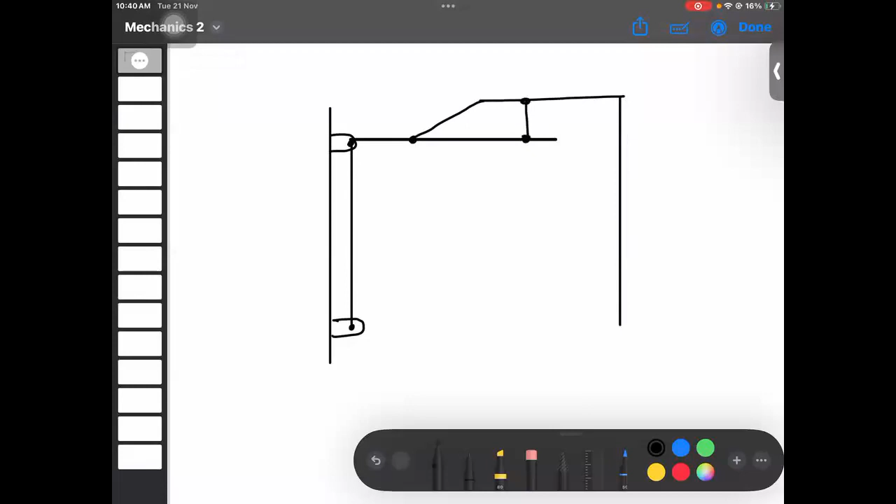This is B, this is E. And both A and F are at the same line, and their respective lengths have been given.

So how do you find the force? The better way of solving this would be finding the forces at D. If I dismantle the frame, take CEF as one frame, and DE links them, and I can take that away. If I can find it, you can see J is somewhere here in between C and D.

If I find the forces at D, what is shear? What would be the shear force at J? If I take the section at J like this, this becomes the right of the section, and this becomes the left of the section. Shear force at J would be the algebraic summation of the forces either to the right or left of the section.

And if I think that there is no CEF frame, if I take away the CEF frame, then I'll have to replace it with the reaction forces, correct? And if I can somehow find the forces at D, then I can easily find the shear force, bending moment, and all the things at J, right?

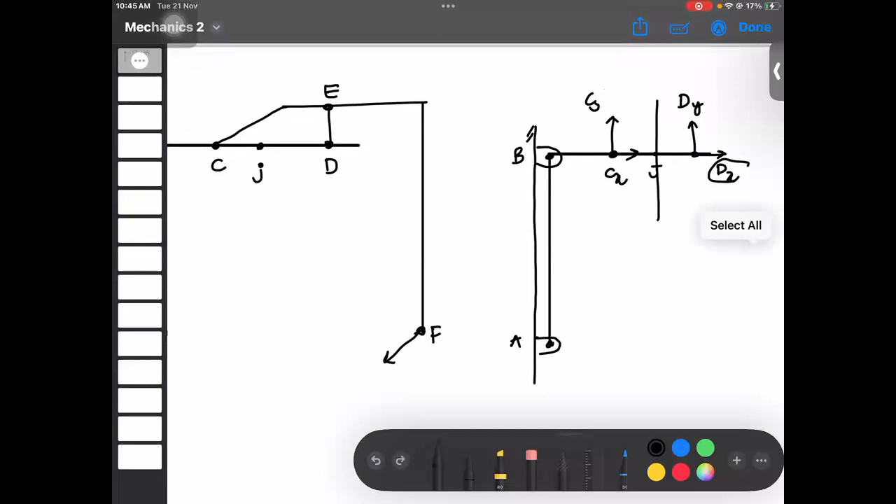So if we can somehow find dx and dy, the problem is over. And dy will also cause moment at J, correct? Yeah, that will cause a bending moment. So our main motive in this question should be solving for dy and dx. DX won't cause any moment, but DY will, right? Yeah, dx is simply passing through J, it will not cause any. So let's find dy and dx, and if we can find them, it's over.

You also need to find bending moment, right? The bending moment is dy times 6 inch at J, correct? Yeah, pretty much, that's the bending moment. So if you can find out dy and dx, that's it, it's over.

So how is it that we can find the dy and dx? We first of all can solve for the whole frame, so that we'll be getting the reactions at A and B.

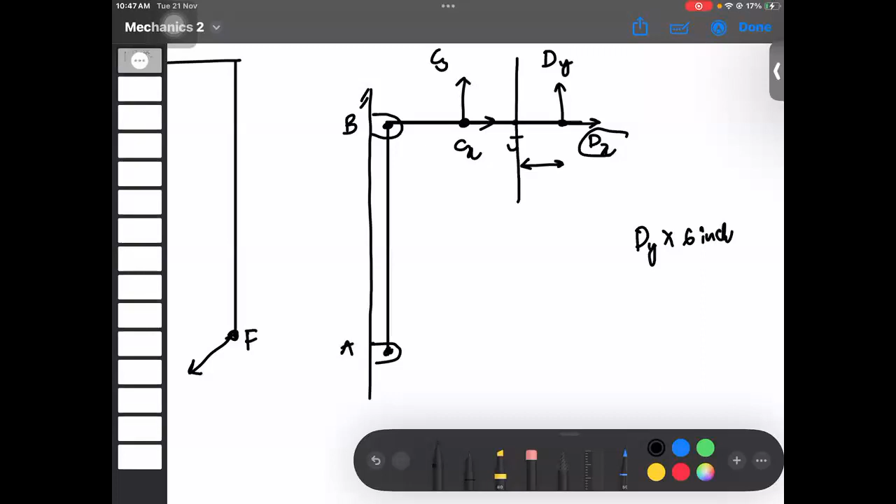Let's take the whole frame. Let's do the equilibrium of the whole frame. At B there can be By and Bx, and at A there can be Ay and Ax, right? And now the force at F, which is 60 pound force, is making an angle of theta.

Is theta given? No, just simply say theta. Do we have to calculate theta? No, I don't think we have to, but I'm assuming you probably need to just to find the X and Y components. No, theta is not given, right? It's not given, but I thought you'd need to find it. Or actually, never mind, you can probably just use it without theta. No, in the solution they say theta equal to 0.

Why? I don't know, you can see that. I don't know why they say that, I'm not entirely sure. Just do it the way you would do it, and that should be fine.

So if it is theta, let me call it some theta, and I can divide this into respective components. This would be 60 sine theta, and this would be 60 cos theta. By plus Ay should be equal to 60 cos theta, and Ax plus Bx should be equal to 60 sine theta, correct? So you're just summing up all the forces, right? Yeah, all the normal forces, Ay and By are upward forces, balanced by the downward 60 cos theta force, and Ax and Bx are towards right, and 60 sine theta is towards left, that must be balanced.

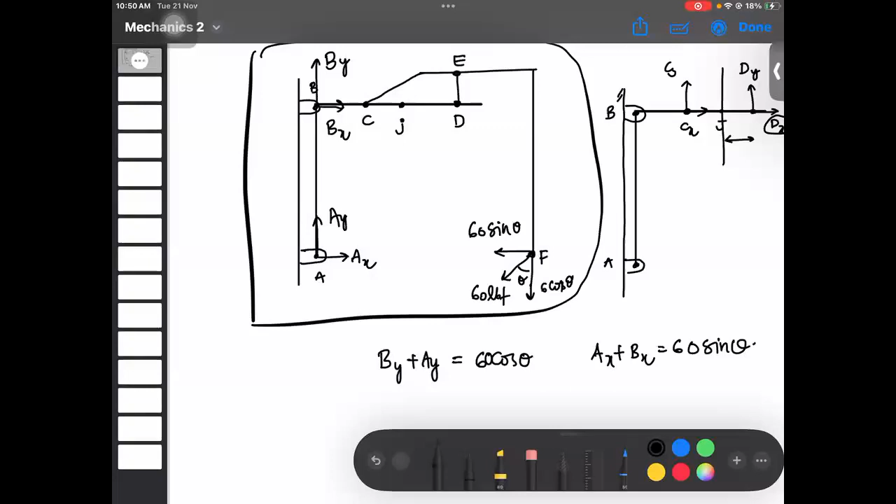See, I have dismantled the structure only at A and B, that's why I'm representing the reaction forces there. I haven't dismantled the member at C and E. Whenever you dismantle the structure from its frame, from its condition, then and only then you'll have to represent it with the forces. And you can see in the second diagram, I have dismantled the CEF frame.

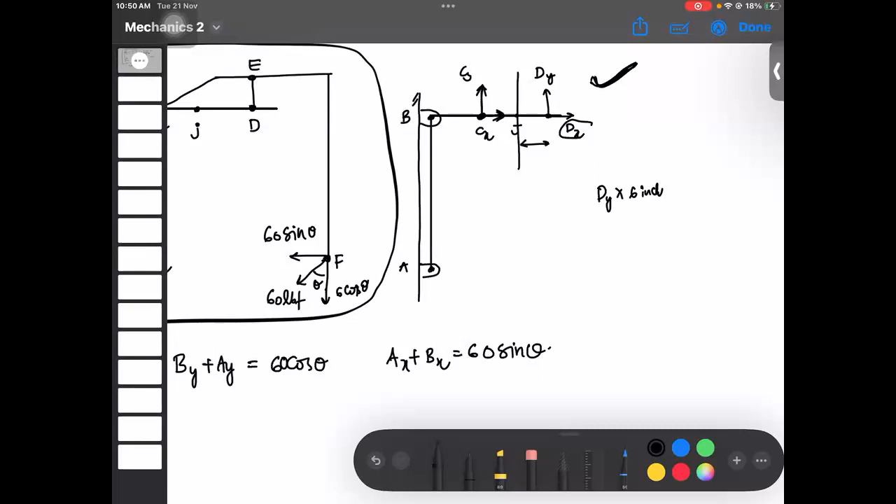That's why I'm representing the forces there. Wait, say that again, sorry. In the second one, I have separated both frames, I have separated CEF from ABCD, and that's why I'm representing the forces, indicating the forces at C and D. Oh okay, okay, in the first one I have not done that. Only I'm dismantling at A and B, that's why I'm representing forces at A and B only, the reaction forces.

So C and D are categorized as internal forces? Yeah, whatever forces are there, they are internal to the structure. No force is acting externally on C and D, right?

Yeah, there are forces there, but for the combined frame, there are no forces there.

Correct. When you separate the frames, when you dismantle them, then we'll have to represent the forces there. You may ask me why I have represented Ay and Ax. The thing is, I should not have drawn this. I have dismantled the structure only at A and B, that's why I'm representing the forces there.

And you can see, if I can draw this, there is also this, correct? The hinge thing and all. Now on the hinge, the forces will be something like this, the opposite of what I have drawn on the frame. When the hinges are on, there are no forces there either, though.

Correct. So in the combined frame, suppose the only force is 60 sine, the external one. And you can see, if I combine this one and this one, again there will be no forces. They get cancelled with each other. They are opposite to each other. Whenever I dismantle the frame only, then the forces come into the picture. When I attach it, the forces get cancelled, they become zero.

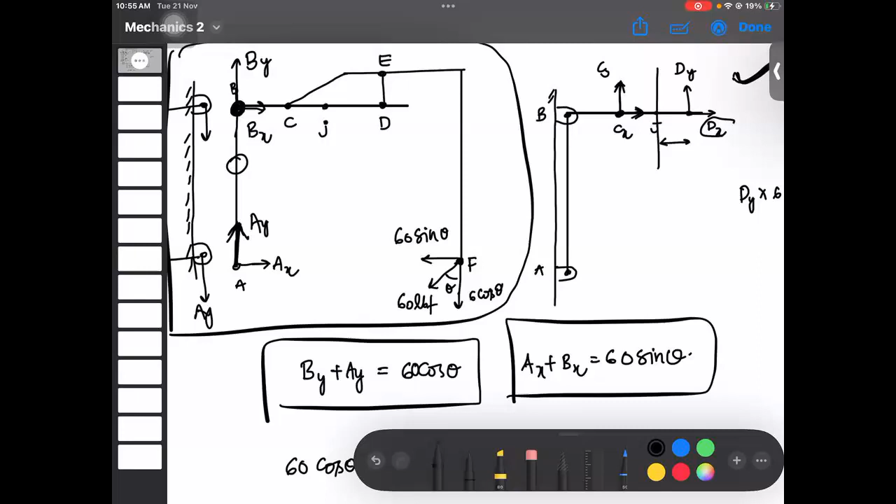And you can see Ax is also creating moment about B, and that will be equal to Ax times 8 inch. Wait, you're calculating the moment from at what point exactly? At B, about B moment, I'm taking it about moment B, that point. So Ax times 8. Yeah, Ax multiplied by 8, correct? Yep, and that would be counterclockwise, Ax multiplied by 8.

And also, 60 sine theta is also creating moment, and that is again clockwise about B. Wait, Ay is not creating any moment because it simply passes through B. Okay, Ax can create moment. Oh yeah, it passes through B, so it can't. Yep, you're right, Ax can create moment, that is... No, I'm saying Ax, Ay is passing through B, so it can't, but Ax can create, which is Ax into 8.

Okay, and what's the moment created by 60 sine theta? It's again clockwise, it would be 60 sine theta into 8 again. Yeah, it's 60 sine into 8. That I'll have to multiply here. Sir, I'll have to add here because the moment created by both 60 cos theta and 60 sine theta have the same sense.

If it's clockwise, it's negative - that's the sign convention I'm used to. You can follow whatever convention you're using, even if it's the opposite. You can do the same thing either way.

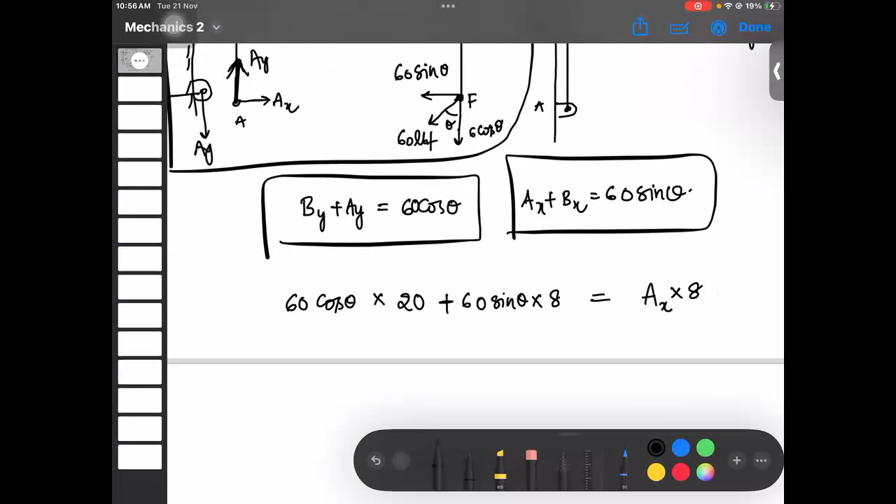Whenever you're taking a moment about something, you write down all the forces creating clockwise moment, then write down all the forces creating anti-clockwise moment, and equate them. That's it.

It doesn't matter about the sense or the signs exactly - clockwise and anti-clockwise moments must be balanced, because regardless it'll get cancelled out. So these are 60 sine theta and 60 cos theta - they were creating clockwise moment about B, whereas AX was creating anti-clockwise moment, and they must be balanced.

So you can see from this - this is one equation. And if they had given theta, I could have calculated AX. So you can see it's the only equation.

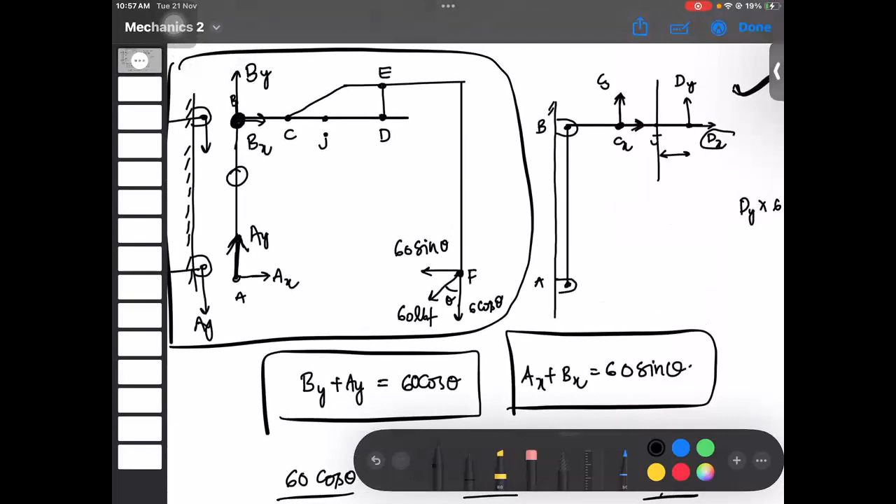I think you could probably just calculate it - couldn't you just do 60 cos theta and then put it in the previous equation and calculate from there? You could write this equation in terms of 60 cos theta and 60 sin theta, but... never mind, that wouldn't make any sense, that would be too many variables.

So far we have three equations and two unknowns - theta can be assumed constant, you can probably assume it's zero. I think if he says it's zero, it's zero. I don't know why they didn't include that.

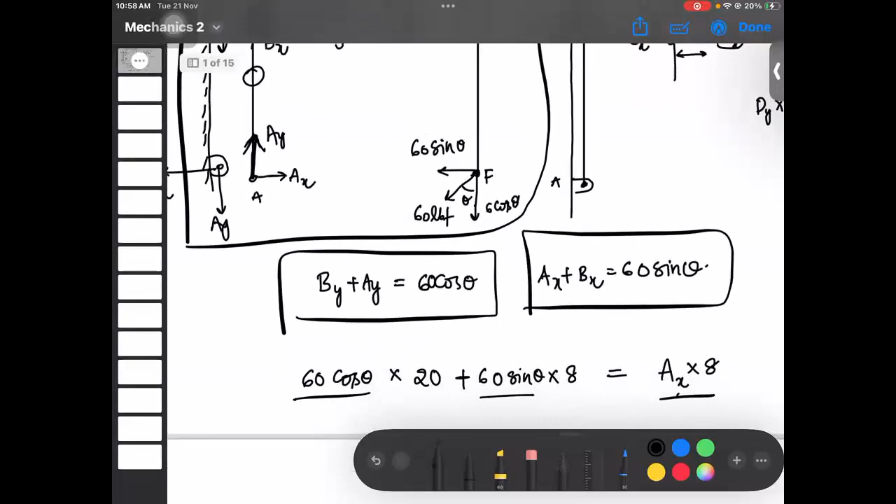So you can just write theta is zero. Shall I take theta to be zero? Yeah, sure, you can take theta as zero. Then sine zero becomes zero, and AX becomes minus BX.

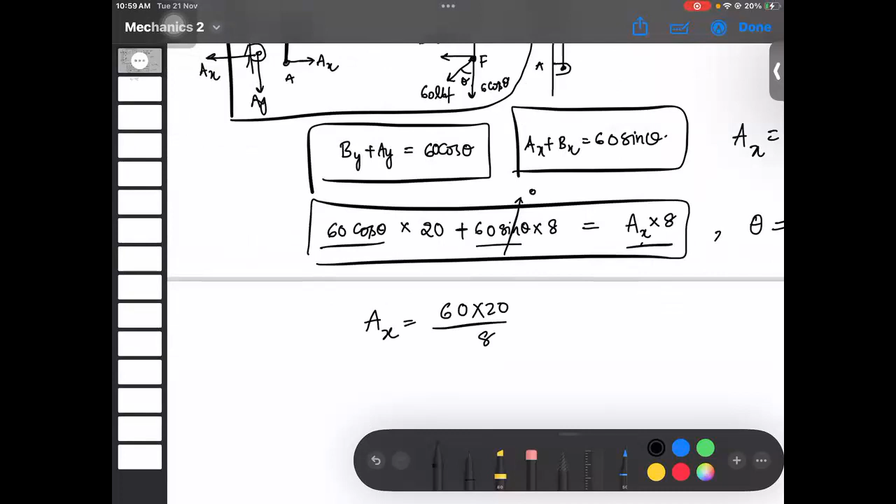From the second equation, this becomes zero, and AX becomes 60 cos 0, which is 1, so 60 into 20 by 8. So AX becomes 60 into 20 by 8, and minus of AX would be BX from this equation.

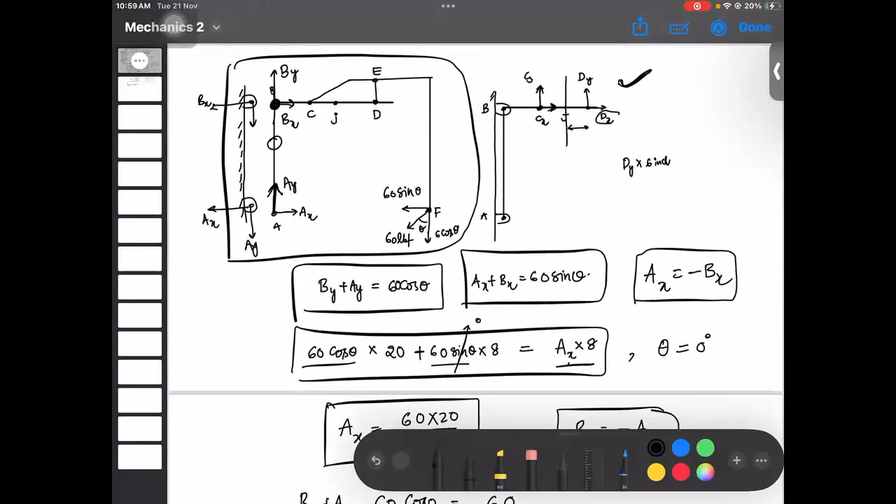And we have one more equation - BY plus AY is equal to 60 cos 0, which becomes 60. So far we've found out two forces, but AY and BY are still unknown. We need one more equation to find BY - the moment taken about A, they have taken moment about...

So we have four unknowns, right? We have four unknowns but only three equations here. Can I get anything if I take moment about B? If I take moment about A, for B I'll not be having anything - I can get BX, but I've already got that, which is minus times AX.

Why don't you take a moment about F? Taking moment about F is of no use actually... yeah, so I can take moment about F. Let me take moment about F. So if I take moment about F, what are the forces that can create moment about F?

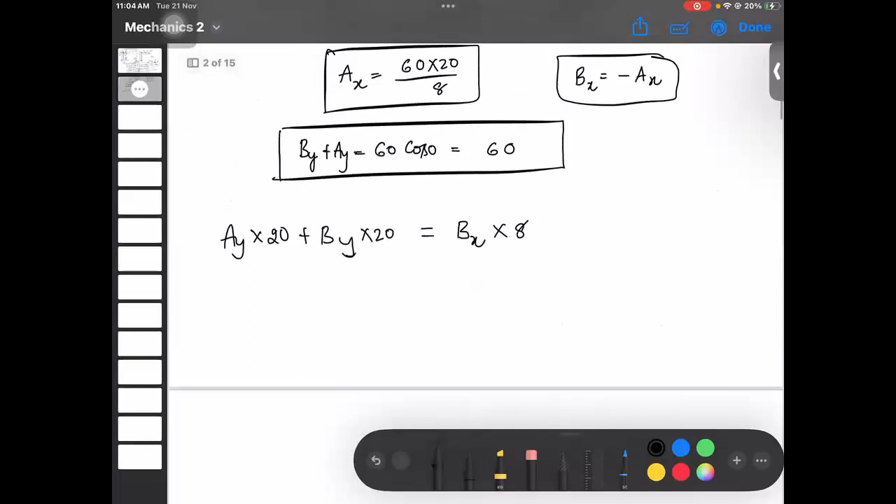So BX into 8, correct? That's one equation. So how does this help us in terms of point J exactly?

So yeah, see with this, what happens, you know. So you see if through all this we can find AX, BX, AY, BY, right? Doing all this will give us AX, BX, AY, BY, and then you can go to the second frame.

Got it? Like, one second. Sum of. Can you go down one second? Yeah, sorry, should I repeat, just want to see that again. I just want to see the last equation that you wrote.

Yeah, this one. See, yeah. AY and BY are in the same sense. The moments created by AY and BY are in the same sense. Okay, yeah, and they are at a distance of 20 inches from F.

And that's why I multiplied AY into 20, BY into 20, and BX is opposite. No, got that. So this is one equation, and you can see AY plus BY should be equal to BX into

8 by 20. BX into 8 by 20. But AY plus BY is also 60.

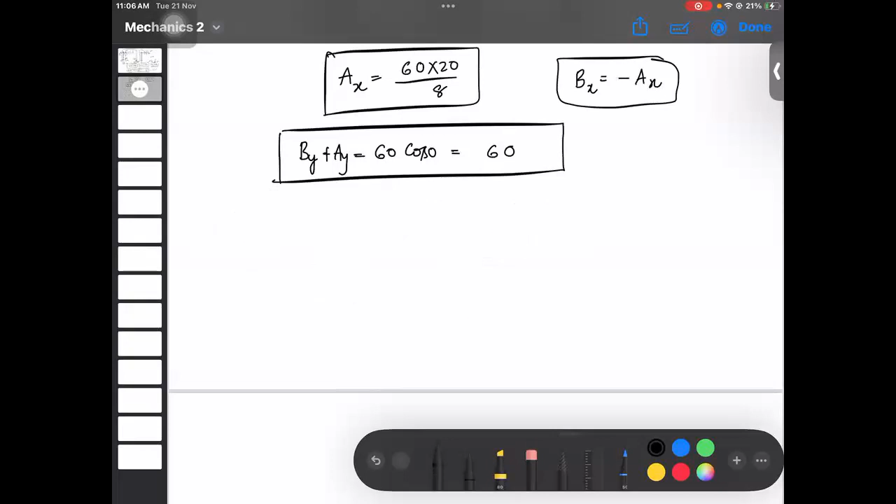So the thing is, you can use it, see, it's a 2D problem, right? It's a two-dimensional problem. You have used the force balance in x direction. You have used the force balance in y direction, and you have taken moment about one of the points, which is, what is the moment we have taken about? We have taken about B. That's it. Then that means you have used all the equilibrium conditions.

Even though you take the moment about any other point, you'll end up with the same equation again. You got? Okay, yeah, correct.

So we basically used all the equilibrium conditions for a 2D problem. Correct, every force is in one plane. So you have used the force balance in one direction, you have used the force balance in the other direction, and you have taken moment about one of the points. So basically you have used up all the equilibrium conditions. Even though you take the moment about any other point, you will end up with the same equation again.

Okay, yep. So that means if we can't take the moment about, so taking moment about any other point will not give us anything. Okay.

So how is that? That's the thing I was looking for. How is it that we can solve for the other two? That was my problem. So okay, let's go through this one.

Suppose we don't know AY and BY, but we know AX and BX. So yeah, that's the thing. You got it right. We have 4 unknowns, but we only have 3 equations.

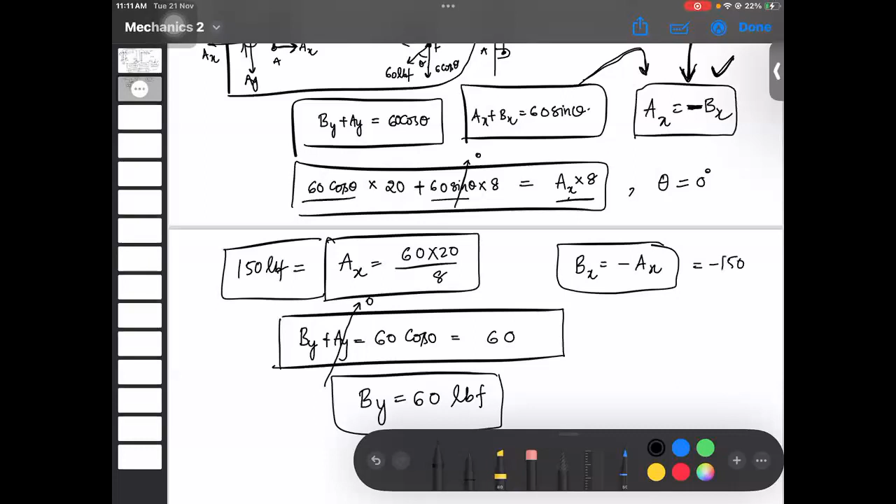So BX will be minus of AX. So that will be minus 150, or you can just reverse the direction. Okay, so now let's go to this individual frame.

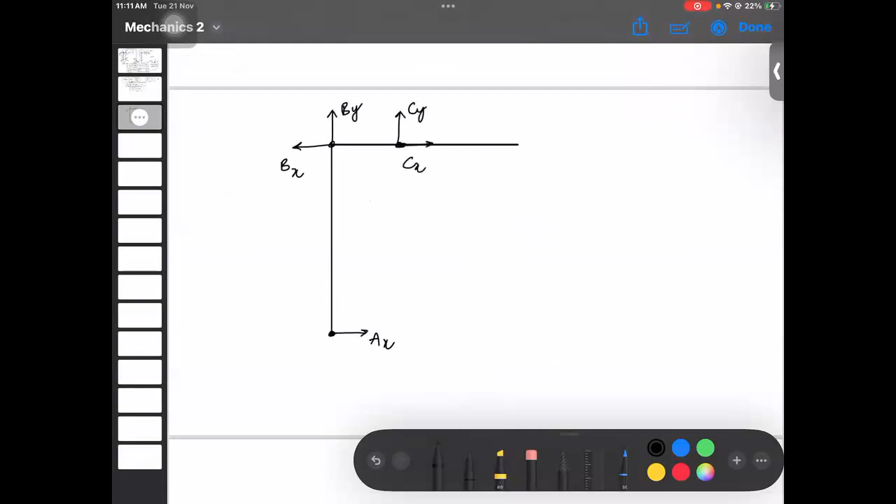Okay, now let's discuss. So we don't have AY, we have AX, we have BX, that is up. They should be in opposite direction because AX is minus of BX, and we have BY, and we have dismantled it. We can have CY, and we can also have CX. There is Z somewhere here, and at D, completely dismantled it.

Yeah, I've dismantled both the frames. This is Dy and this becomes Dx. Okay.

So first you find the separate forces, and then you do it in terms of section J. Now, initially I took the equilibrium conditions for the whole frame. For the whole frame, okay, I have dismantled the joints at A and B. Okay, initially. Now I'll also dismantle the other frame, C, D, and E.

Sorry, C, E, F frame. If I dismantle C, E, F, then when I separate them I'll have to represent the forces there. And if you are confused, the free body diagram of the other frame looks something like this.

I'll do that for the sake of idea. So this is E and this is the other frame. Okay, and now you can see at D, I've taken dy and dx like this. Now I'll have to take dy and dx like this.

And this will be Cy and Cx. There is a force of 60 lb at F. This is the free body diagram of the other frame. But theta is 0, so isn't it directly downwards? Okay, this will be 60 lb.

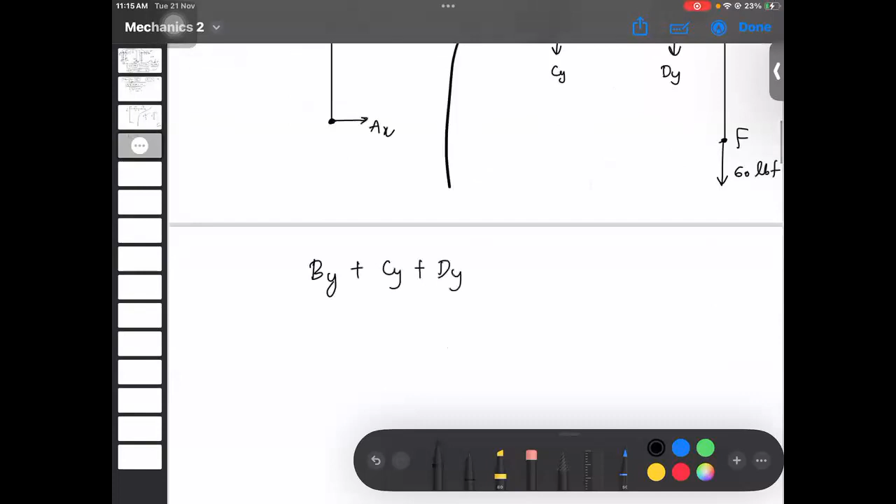After you solve that, you will get some of the forces as minus. Obviously, not all forces in the upward direction will yield the equilibrium condition. Some of them, one of the forces at C and D, may be in the downward direction. I don't know which one is downward so far, but for that I'll take by plus Cy plus dy, let it be 0, because no force is in the downward direction, right?

I mean the 60 lbf, but that's in a different frame, so it doesn't count here. This is one equilibrium condition: summation of forces in the y direction must equal 0. And let's do the force balance in the x direction.

And we can also take, let's do this one, moment balance about point B. If I take moment balance about point B, what is the moment created by Cy?

The moment created by Cy about B in the first frame. I'm talking about only the first frame, writing for ABCD. This is A. Cy about B is counterclockwise, and dy about B is also counterclockwise. The moment by Ax about B is also counterclockwise, correct?

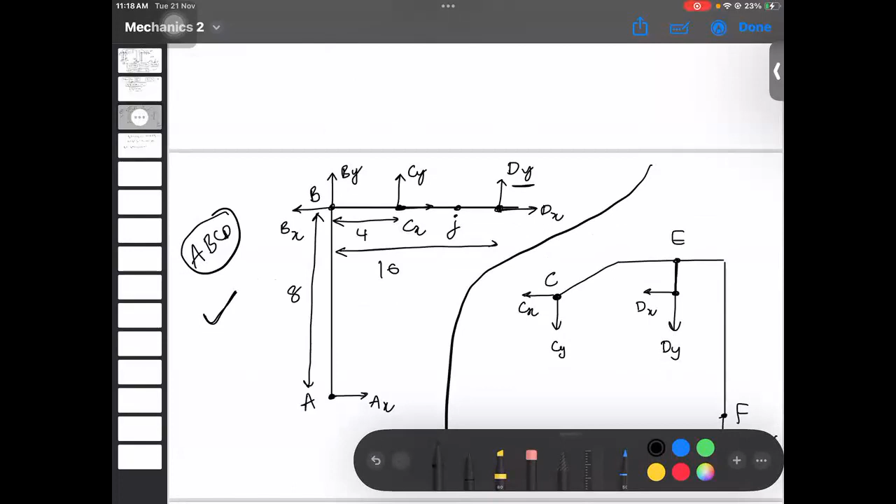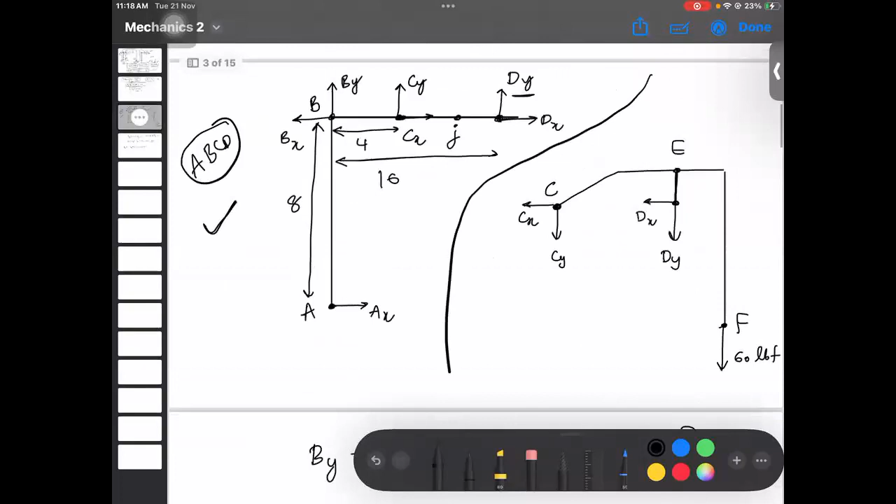Correct, so my intention is to find dy and dx now. So just leave J for now. And let's talk about the moment equation about this point. And you can see how many unknowns we have - we again have 4 unknowns, and we used up...

So do we have ax, correct? We have ax, and we also have BY as well, so then we can do two different equations. Because we have these two equations, we have BY, which is 60, so we can move it to the other side. So CY plus DY is equal to 60, and then we can just do simultaneous equations from there with 1 and 3 to find CY and DY. From 1 and 3 we can find these two. Yeah, let's do this.

Okay, we have this equation, correct? So from 1 and 2, what is it that I can use here? Let's take this from 1. What is it that I can write? Cy plus dy is equal to minus by, which is, from minus this, BY is 60, as you said before. And from this I can say, from equation 3, Cy plus, I'm taking 4 as common, 4 dy must be equal to minus 2ax. If I take 4 as common... I'm taking 4 as common. This 8 becomes 2 times 4, and this becomes 4 times 4, 16. So 4 can be taken common, and equated to 0. And this is what I get, correct?

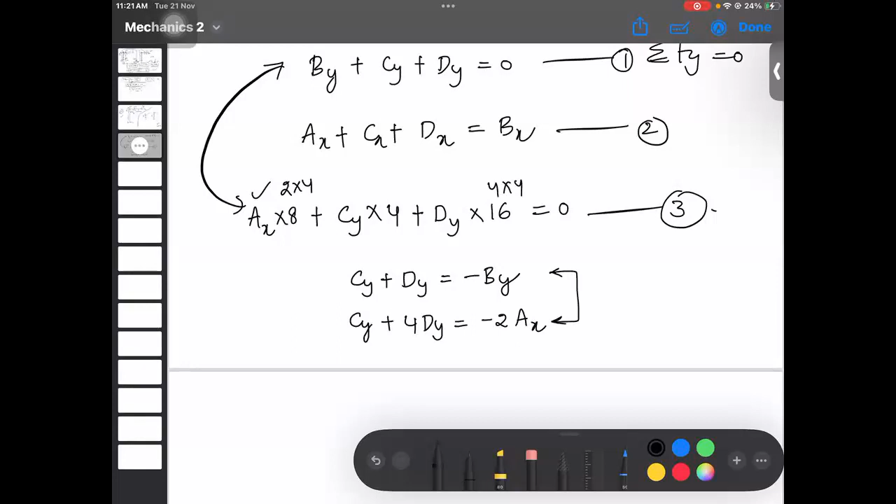These are the two equations that I get, correct? Yeah, you do get those. Let us subtract equation 3 from equation 1. So this cy gets cancelled. From this I can get 3 times dy should be equal to minus 2ax plus by.

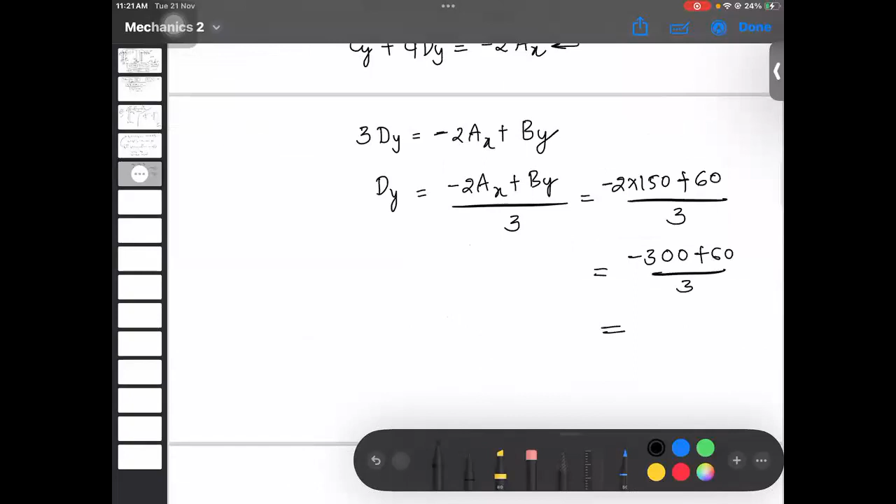And we have, from dy, I have this minus 2 times ax plus by, divided by 3. And what is it that we have for ax? Ax is 150, so we already calculated this. Minus 2 into 150, and for by, I think we have 60. That is 60, divided by 3. And what would be this? This is minus 300 plus 60, divided by 3. And minus 300 plus 60 might be minus 240, divided by 3. And this would be minus 80.

Correct? So yeah, and you can then see DY, we are getting... One thing, we are getting a minus sign, right? That means I'll have to reverse the direction of dy, like you said before. Let's just take the... no. Initially, when you are not sure about the sign, you can take it in one direction. If the answer comes out negative, then you will have to reverse the direction.

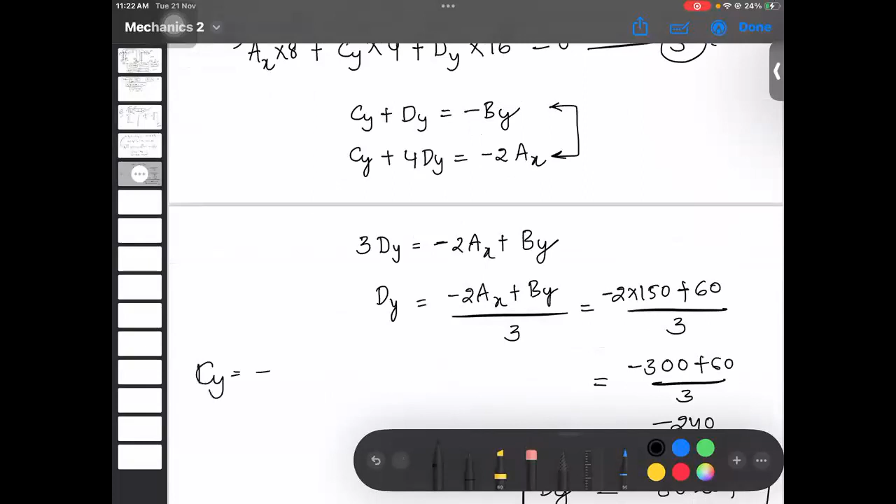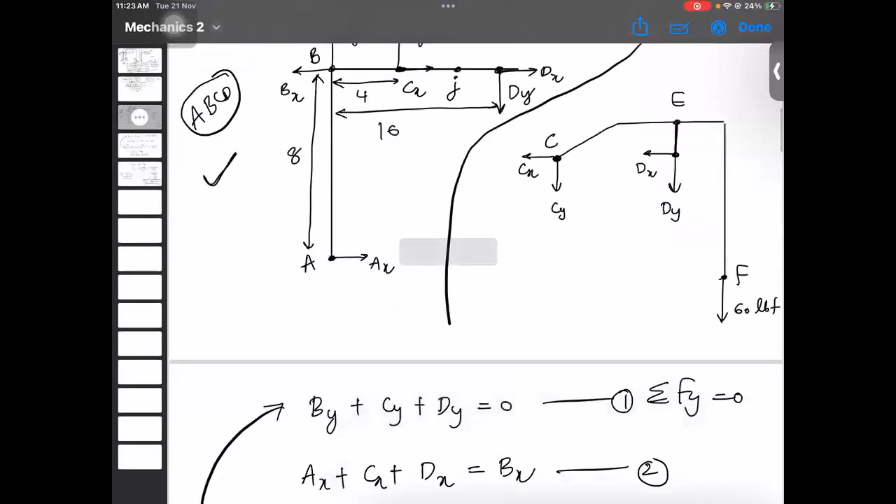Okay, so now this will be the direction of dy. And let's talk about what cy is from this. You can see, from the first equation, cy is minus by minus dy, correct? Yeah, so it's 20. One second, and by is 60, and what is minus dy? Minus dy is plus 80, so it would be 20, like you said. And since you are getting the same direction, which is positive, correct, that means you don't have to reverse the direction of cy. And so that will be this.

And what about cx and dx? So we can find cx and dx like this. You can see for that, so far we have found out cy and dy, right? And we are yet to find, we should still find cx and dx. And you can see in this abcd frame we had four unknowns, right? Cx, dx, cy and dy. That can't be found out with three equations, correct? Yes, and for that we'll have to take the help of the FBD of the other frame.

You can see we also have one more frame, the cef frame. And in the cef frame, if I take the force balance in the x direction, you can see cx plus dx should be equal to 0. And that means cx should be the negative of dx. Let's use this here. If cx is negative of dx... Okay, and that means they get cancelled actually. They get cancelled. Yeah, okay, okay, okay.

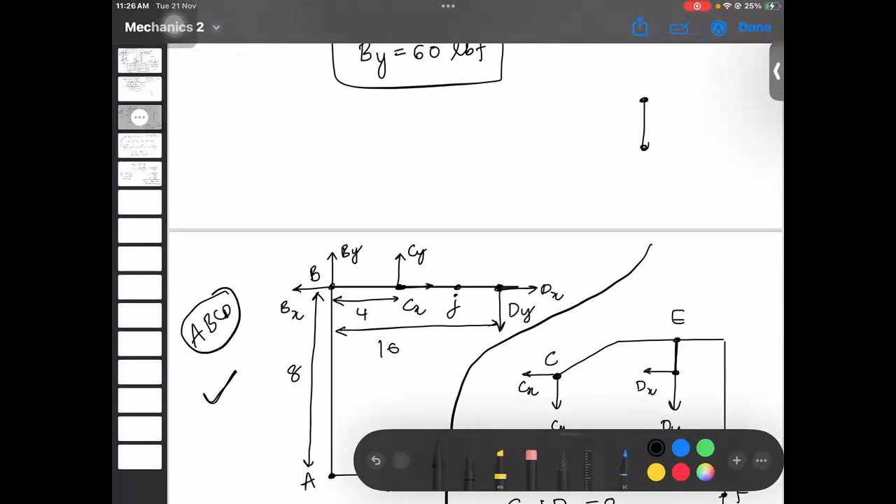So we still have one more frame like this. For this frame, we have one more small frame which is DE. Can you see those two frames have been linked to ED, correct?

And you can see for this ED frame, whenever we have a two force member, the force should be only along this direction. So this is a single structure, that's one thing you'll have to remember. Whenever we have a single force, single member, the force will be along the member.

For this to stay in equilibrium, you have a single line like this, like a single metal rod with D and E, the force will be on either side, and we will not have any force like this.

So let me talk about this DE frame. I just dismantled DE. So if I just dismantle DE, what is it that I have to represent? I'll have to represent EY, EX, and DY and DX, correct?

Wait, I've taken just that small DE pin, which is connecting both the pins. So when I just dismantle that out of the frame, I'll have to represent every force that is acting there, correct?

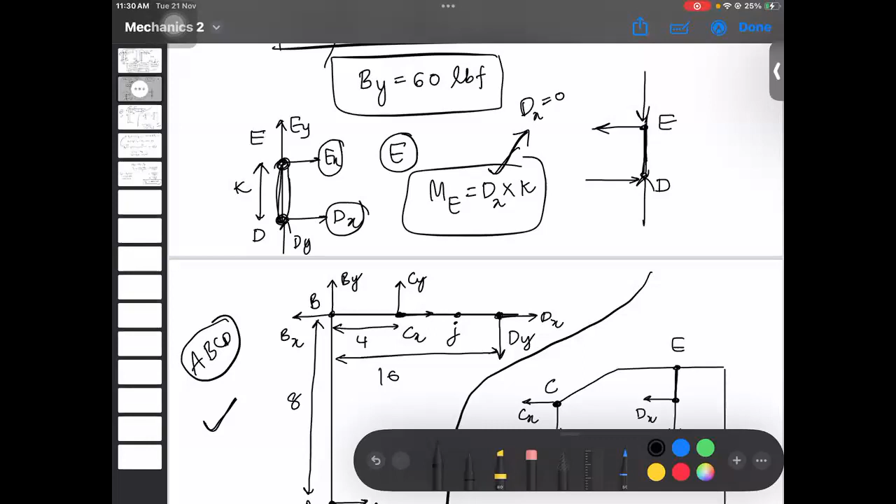The other way of countering it: if I take the moment about D, then only EX can create moment about D, correct? And again the same thing, this link is not rotating about D, so EX should also become 0. In that case, whenever you have a single pin structure like this, you will have only forces in this direction.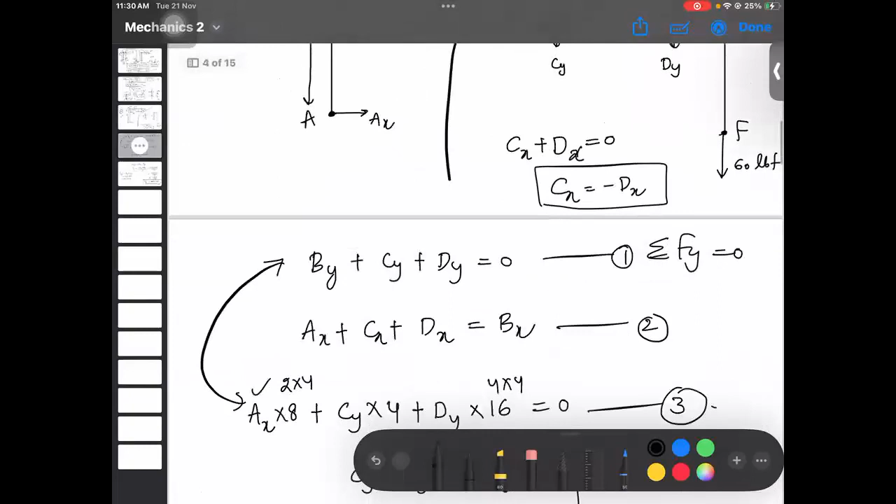Single straight member like this. That means dx should be 0. So from this we get dx as 0. If dx is 0, cx should also become 0, because cx plus dx was 0.

Wait, sorry, go up again. Isn't dx 0? So we conclude cy and dy will still be there, right? Cy and dy will still be there.

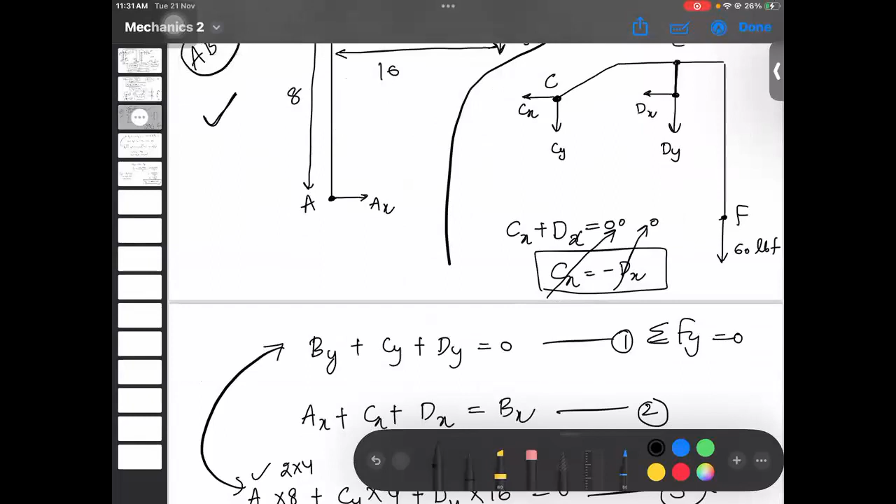Oh okay, I got it. DX is 0. If dx is 0, then from this equation, cx is also 0. Dx is 0, and so then we will be getting this anyway.

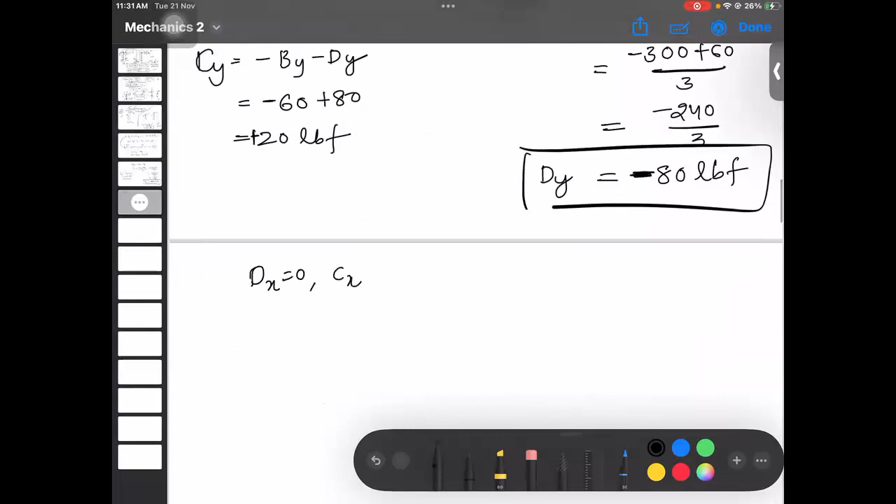And the thing is, we concluded that dx is 0 and cx is also 0. So dx and cx are 0. Now let's come to J. Now we have found out everything. Dx is 0.

Now take a section at J. Now what would be the shear force at this section? If I take a section at J, this will become the right of J, and this will become the left of J. What is the shear force at J?

Shear force is the algebraic summation of all the forces either to its right or left. If I solve for shear force at this section J using the right part of the section, I only have one force to its right, which is dy. So what would be the shear force at this? That would be dy. Shear force at J.

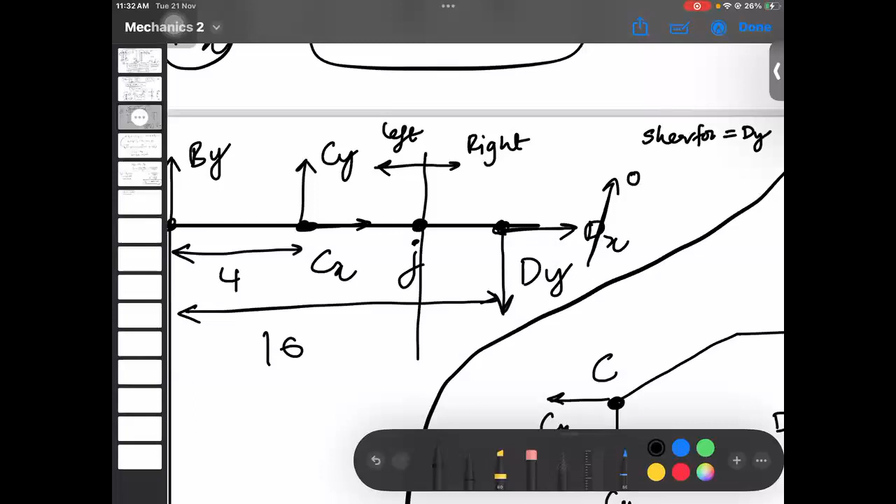Positive, right? So if we are solving from the right part, that would be positive dy. Okay, and that's one thing found out.

And what would be the moment? What would be the moment at J? Bending moment at J, dy times 6 inch.

Again the same thing. No, no, I got it, I got it, I'm just writing it down. I'm finding the bending moment using the right part of the section. I only have one force that can create moment at J, which is dy, and that would be equal to dy times 6.

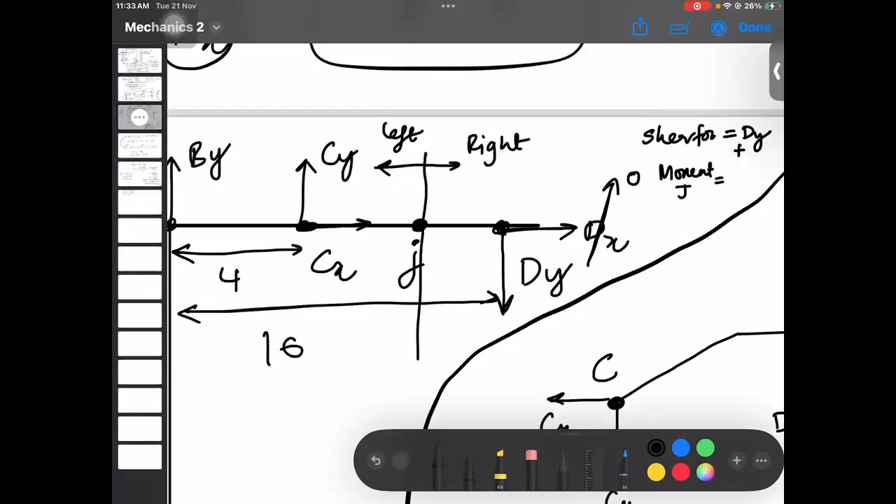Shear force is just dy, right? Which is positive, and then bending moment is dy times 6. Bending moment will be dy times 6. And what is the axial force?

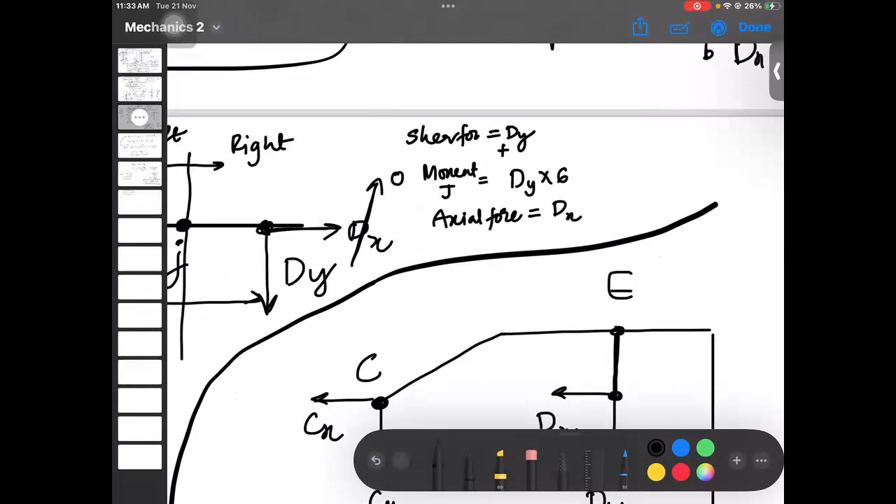Axial force should be dx, but dx is 0, so it's 0. That's how we find out shear force, bending moment, and axial force at J.

Is that it? Or there must be more, right? No, no, no, that's it. We have found out axial force, shearing force, and bending moment. The three things they are asking for in this question.

So that's 0. And what is V? V is shear force. And in our case that's dy. What is dy that we got? Which is 80.

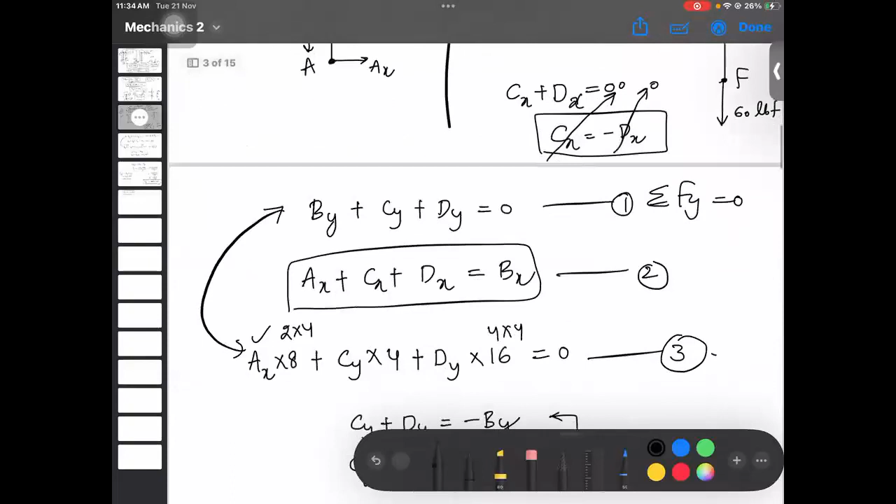Dy that we got, yeah, that's 80. Negative 80. So, since we are solving for the right part, that would be positive, correct? You can see that is 80.

And in this question, in your answer, they are solving using the right part or left part of the section. The reason why I've taken the right part is because I had only one force to its right, correct? That would be simpler, easier that way. We are still getting the same answers, right?

Yep. And what is the moment created? Moment created would be dy into 6, correct? From our part, from our solution.

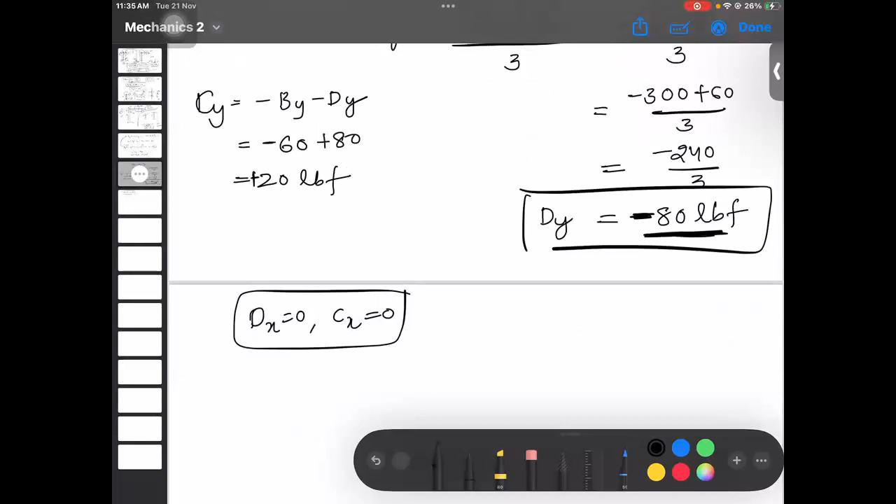Yeah, dy into 6, yeah, you're right. Dy is 80. 80 into 6 is 480. So even your answer is also right, yeah, it's correct. So that's the reason why I've taken the right part, and that's the reason why I'm so much interested in finding dy and dx.

Okay, because I have only two forces, right? So I won't be bothering about cy, by, cx, ay, and all those things that's left.

Okay. You can still... the formula that I'm so confused about, what is the formula that they used, what is V in that? I'm kind of confused there. Okay, so they are solving, using the right, actually that's shear force.

Oh, so yeah, they broke it at that part. See, that's so my doubt is, even my professor, he breaks a section, and then he draws directions for the moment, the axial and the shear. So how do I draw the moment for the axial and the shear? Like, how do I draw those directions? What is the logic behind drawing those directions?

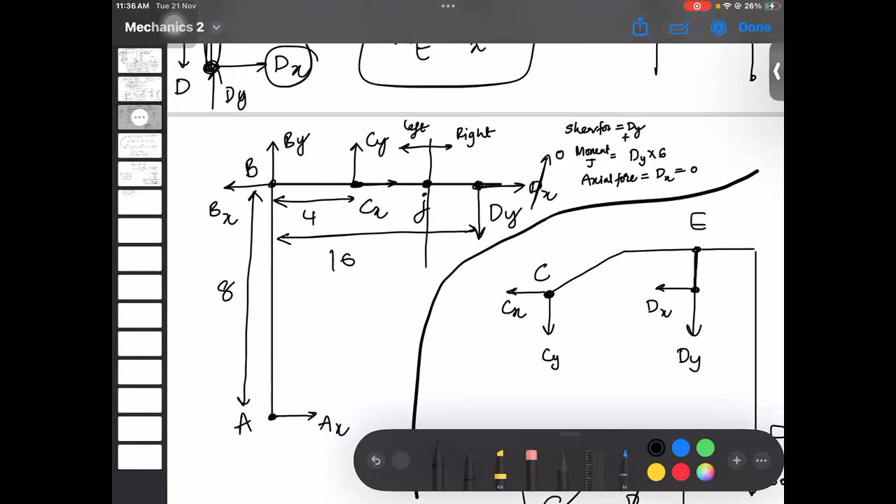See, he broke it at J, and he took the left side, right? That's what you can see. He took the left side, and suppose we are solving for shear force using the left of the section. What are all the upward forces to its left? Only upward forces can create shear force at J, correct?

Yeah, and what are the upward forces that are there here? By and cy, correct? And since we are solving using the left part, all the upward forces will be taken as positive, and the shear force will be by plus cy. That's it.

No, I understand the logic. It's just what are the directions I should use. If you see the example, he's written F towards the right, he's written the moment, and he's written the axial force and the shear force, right? He does that for every question, where he writes the diagram and writes the forces like that on the section.

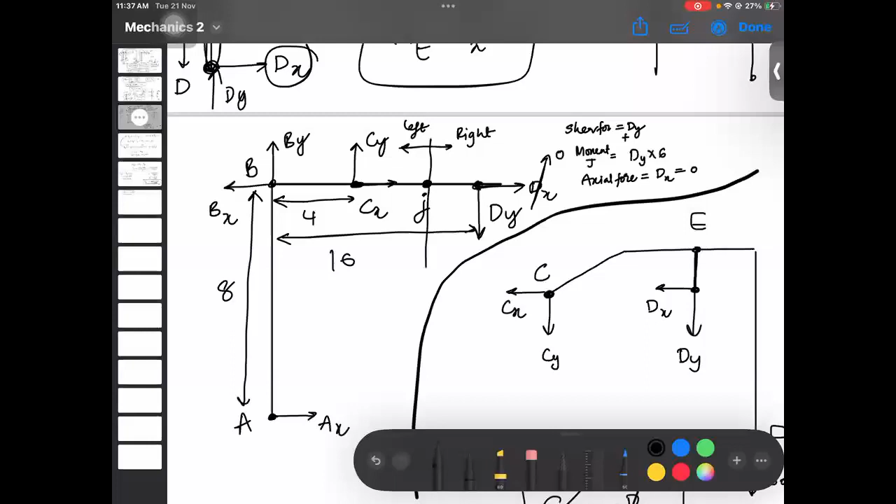Yeah. So I got how that... so how do I intuitively write those diagrams? Because that's how he does it.

So the thing is, he breaks the section at J. Yeah, he breaks it, that's what I'm trying to tell you. Whenever he breaks it, he draws forces on that end. I understand where he's drawn the forces, but the direction of the forces is what matters in that case, because that's what gives you the right answer. At J he has broken the section.

Okay. Yeah, he broke it right before J, and he is taking the left part to solve for the answers. Yes, so we have by like this, and we also have cy like this. You can see, if I break, now we also have bx and ax, right? And you can see I have broken the section at J. By and cy are in positive y direction, correct?

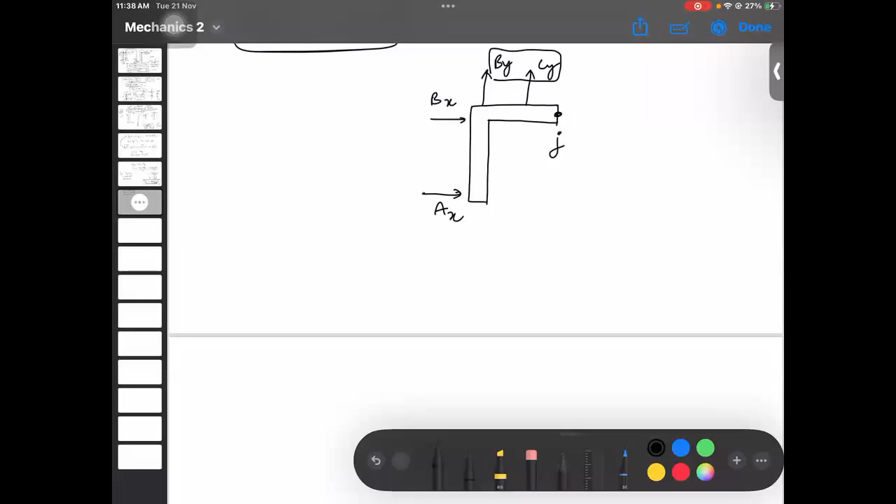The only way this frame can be in equilibrium is if there is some force acting in the downward direction at J when I break it. There has to be. That becomes your shear force.

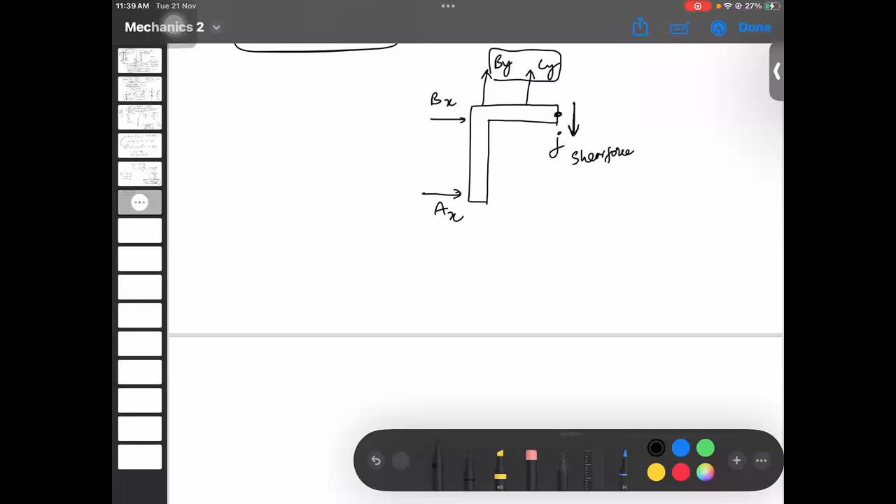Wait, sorry. So when you break it, you need to oppose the two forces going upwards, right? Then only it will be in equilibrium. So when you do such a question, you think of actually breaking that bit, and then you see where. That's the idea, you mentally break it first, and then you calculate.

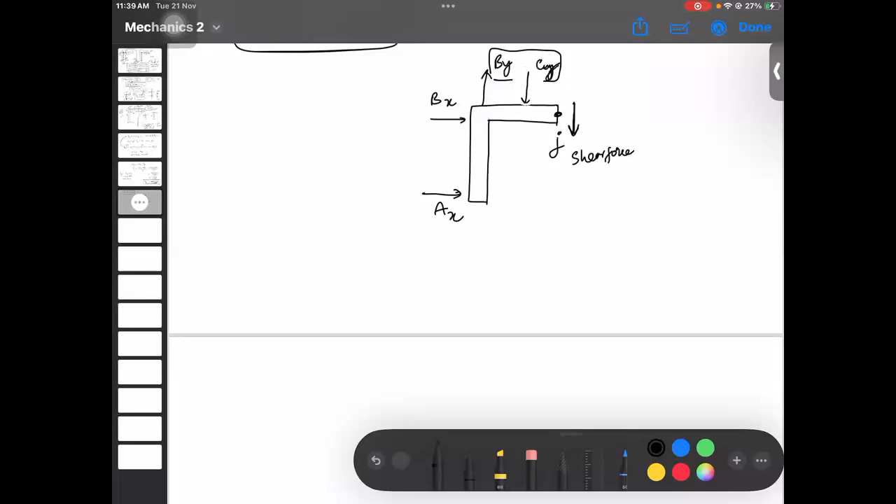Suppose in this question, forget your question for a moment. Suppose by is in the upward direction and cy is in the downward direction, and let the value of by be 60, and let the value of cy be 80. Now, what is the net force on this section because of by and cy?

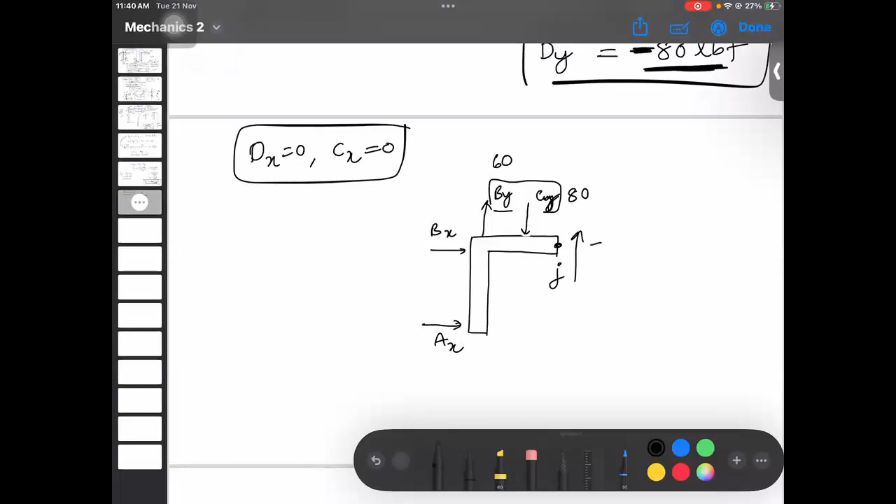It's downwards, like 80 minus 60, so 20. Net force of 20 in downward direction, correct? Yeah. Then for this frame to be in equilibrium, there should be a shear force of plus 20 in positive direction, correct? Yes. So that's how we decide directions.

Okay, understandable. But how does he do axial and bending? Like, which axial and bending direction does he take? Let me explain. You understood the shear force direction? Yeah, understood that. So by and cy were opposed in positive direction. To oppose that, there should be a net shear force in downward direction.

So that is v. Now, from section J, the only forces acting in section J with a Y component are the ones that can create a bending moment going in the anti-clockwise direction. Yes, so the bending moment will be anti-clockwise, and the axial force would be parallel to the x axis, so that would just be straight out of the broken piece.

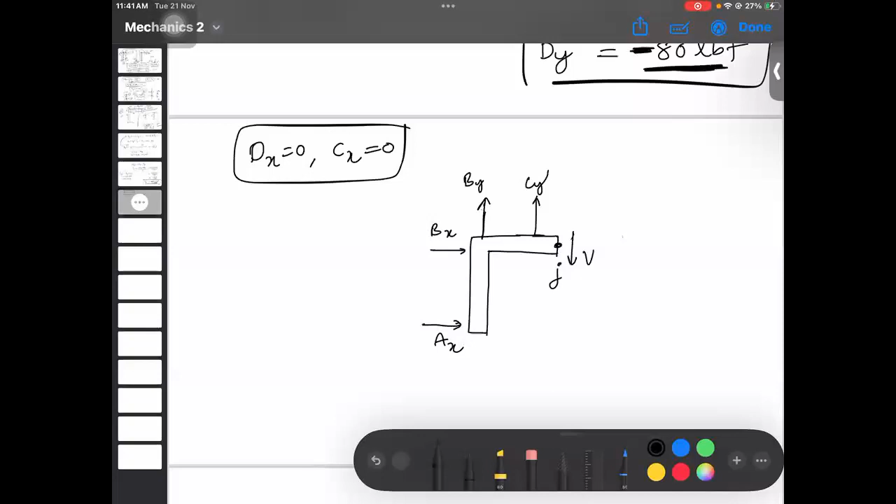One more thing you need to consider is this: whenever we have a single pin structure, we will not have forces in x direction. They become zero. Yeah, I got it, that's how we got dx and ex to be zero.

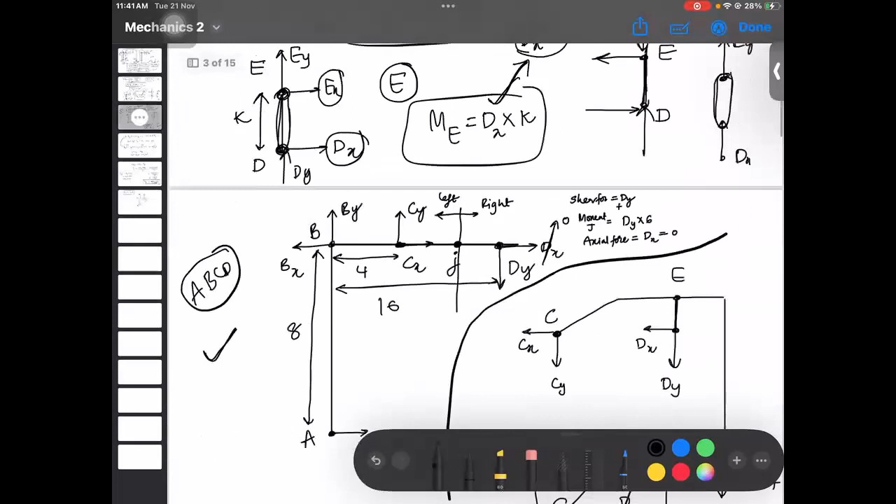Yeah, okay, so it's better to solve it using the right part of the section, so that you don't have to deal with so many forces. Yeah, it seems easier, much easier. Correct. If we solve using the left part forces, you actually have ax, bx, by, cy and all, so it's too much.

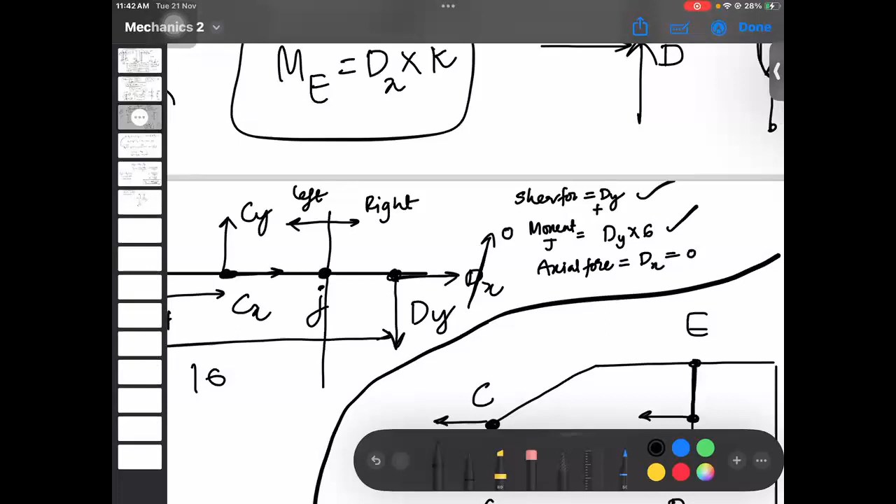To its right, anyway dx is becoming zero, so you only have one force, which is dy. So shear force becomes plus dy, moment becomes dy into 6, and axial force is dx, which is 0. Yeah, so this is how this works.

So first of all, what you have to do is find the equilibrium for the combined frame and find out the reactions at ay, by, cy, and dx, and then dismantle the frame. Okay, yeah, okay, that's how you proceed.

And while dismantling, there is a structure de, because it's a single pin, there won't be any dx, no forces in x direction. You understood the reason why, correct? If there were any forces, the pin should be rotating, but the pin is not rotating, so that's the logic behind it. That's how dx becomes 0.

Okay, okay, so yes, any other thing, anything else?

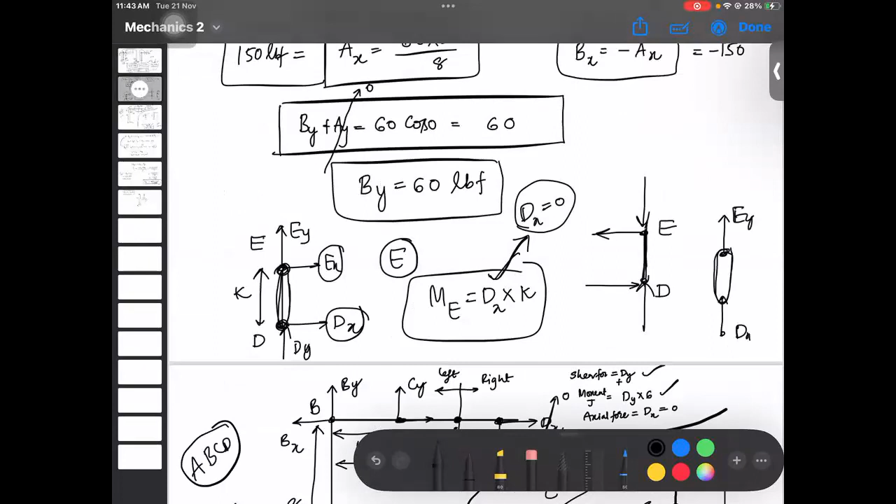Yeah, I sent you the other question, but if you don't have time, you can just send me the worked out answer or how you did it. Shall I do that? Okay, can you just do that handwritten solution? I'll write it down, also for the next class.

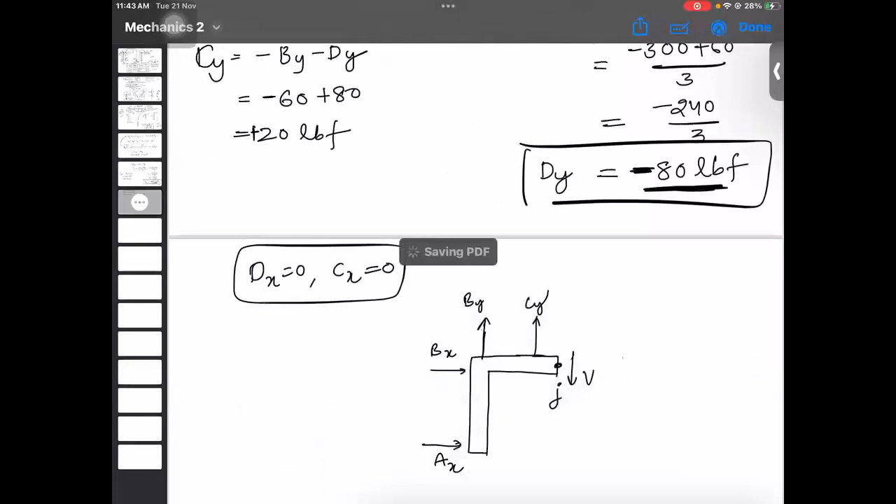Yeah, the next class, can we do it next week? I need it because the week after I have an exam, so if I have any questions, I can just ask you right before my exam. Okay, note down all the doubts that you have, and you can simply ask me. Can we do it next week then? Because the exam is the week after next week, on December 5th.

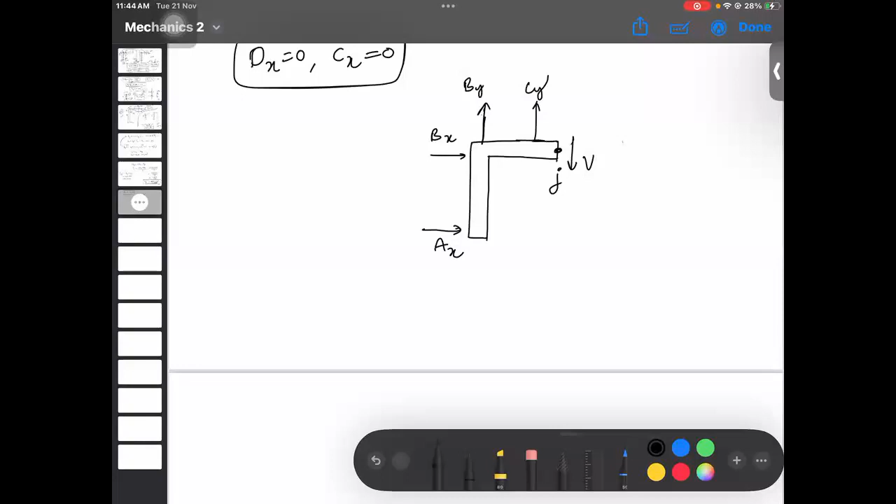So that way I can at least study this weekend and talk to you next weekend. Okay, that's good, that's fine with you? Yeah, that's good, we'll do it next week, Tuesday. Yeah, next Tuesday should be good. So meanwhile, you'll keep practicing and note down all the doubts you have, and we'll solve them.

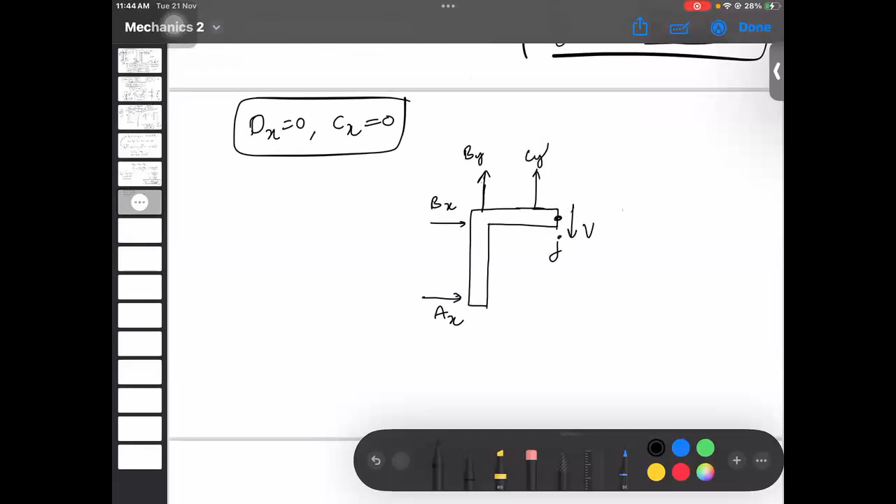Are you gonna do the second bit and send it to me, or can we just do it now? Is that a problem? I'll send it, in another 15-20 minutes. I have some work, after that I'll send it.